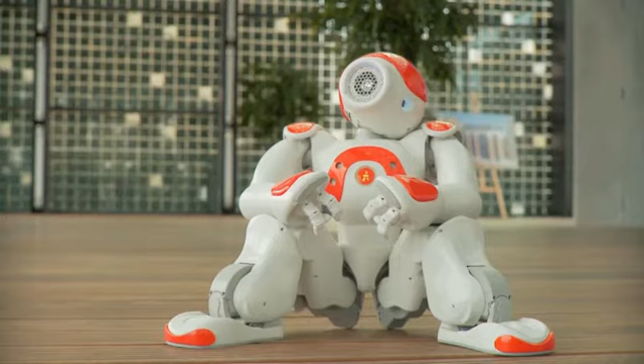I want to come with you.

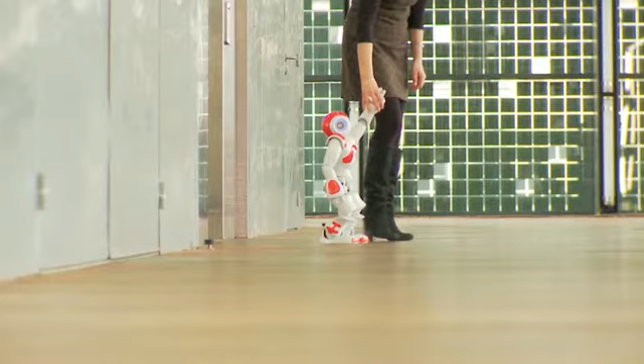Our goal with robots is to have robots helping people, and not only the geek. I want to have robots helping everyone. But in order to do that, we need to have the robot accepted by people.

I'm Bruno Maisonnier, head of Aldebaran Robotics, founder and CEO of the company. Give me something, please.

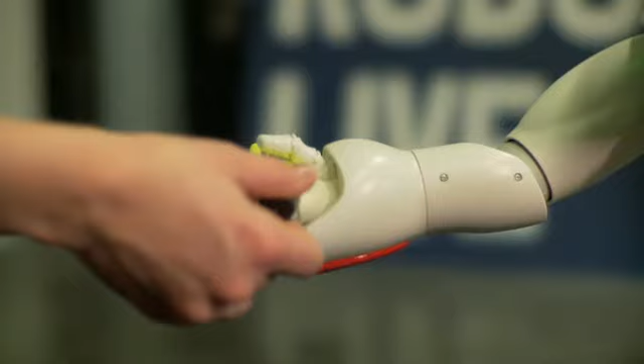We think that the robotic market is going to be huge in the future. And this comes from the simple fact that the world population is aging very fast. And we need robots to do whatever they need at home.

What do you want me to do? When people are depending on someone else and need to have someone else helping them, they are in a secondary position. But when they have a robot doing that, they are in the first position. They are leading.

Notre Dame University in the United States, they are really working with robots helping autistic kids. We discovered that robots are objects they can interact with, they are comfortable with interacting with robots, they like it.

The first impression that you get when you see the robots is the outside shapes. If the shape, if the form is too aggressive, you won't interact with that robot.

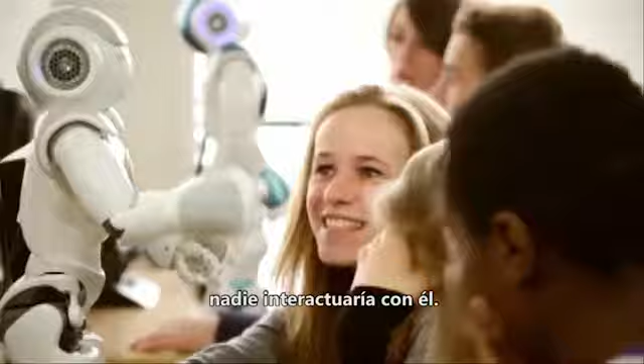There are many people ready to develop software, but we are just lacking robots. We are just missing robots. So that's why Aldebaran began with a platform for providing all those who want to explore this new world, who want to be part of this revolution, to be able to do it.

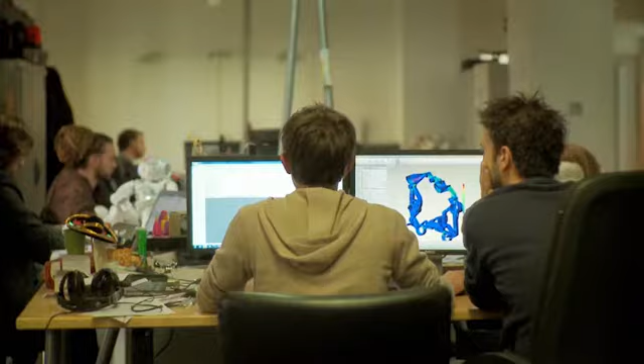I've been working for Aldebaran Robotics for 5 years as a mechanical engineer. I especially work on designing gears and integrating motors into the platforms we develop at Aldebaran.

Like Ludovic, I am also a mechanical engineer. I mainly work on the shells, but also on internal parts and the structure.

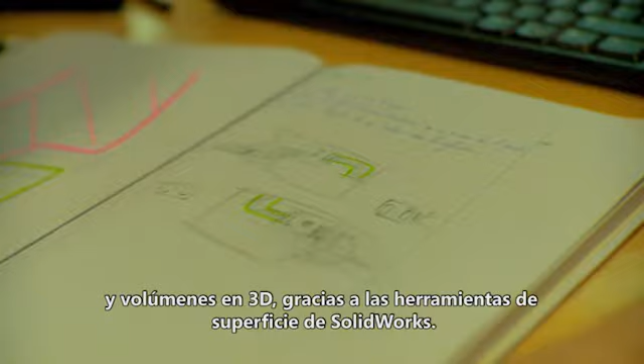For each project, the process is similar. We start with sketches, essentially 2D images, that we then translate into digital data and 3D volumes using SolidWorks surfacing tools.

This gives us the ability to rotate the pieces and robots in the space and to improve the design when it's not as pure as we want it to be.

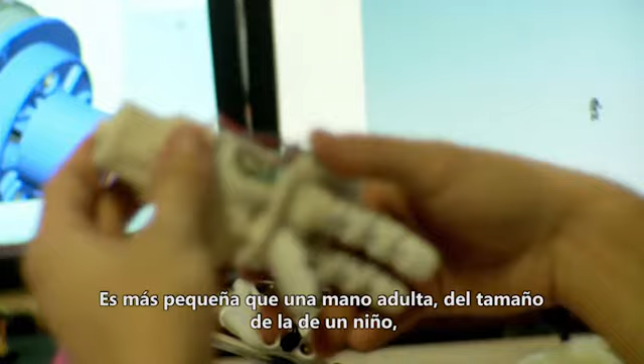So we start with the exterior design of the hand as we have here. It is smaller than an adult hand. It's the size of a small child's hand. And inside there are over 100 parts just for one hand.

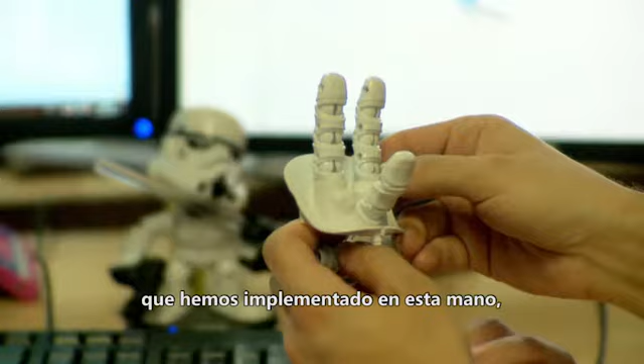In addition to all mechanical constraints, we have 2 degrees of freedom that we have implemented in this hand, and SolidWorks allows us to look at all the possibilities and optimize the mechanical design inside the hand.

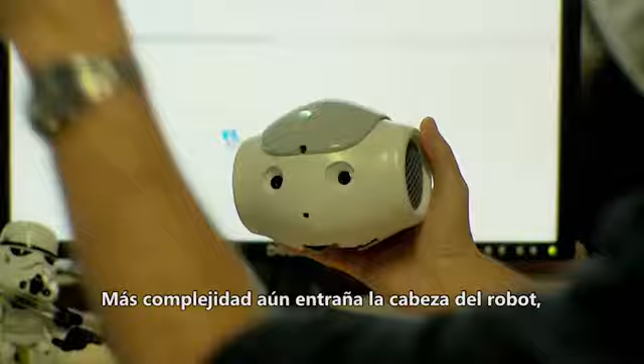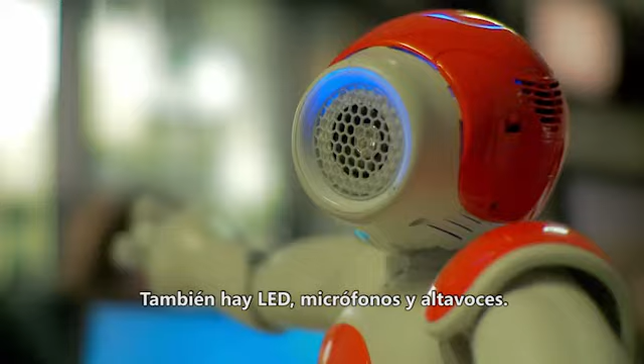Even more complex is the robot's head, which combines mechanical, electronic, and optical components, like cameras, for example. One might say that all of Nao's intelligence is gathered in its head. There are also LEDs, microphones, and speakers.

We use SolidWorks simulation, which allows us to generate digital models and know if the part will resist shocks or not, based on stresses we apply to it.

And once we have proceeded with validation in SolidWorks, we can move on to production.

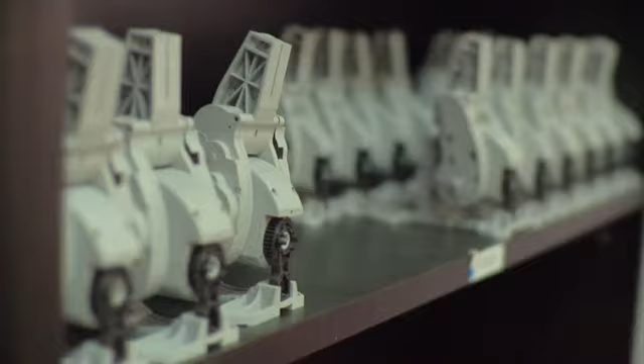We use SolidWorks in order to project the product into the future, and we can really optimize, really improve the parts before it exists, before it is manufactured.

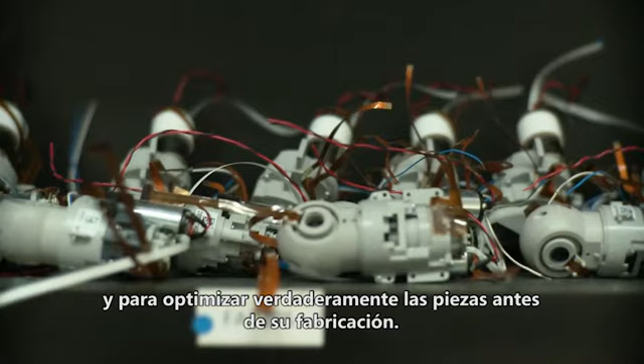You have to know that into that robot there are more than 1,200 plastic parts. On my team, there are 45 people working on the design, and I need to orchestrate the daily work and make sure that when we create new parts, the version is correct.

So for that we use EPDM, and it helps us to focus on innovation while EPDM is taking care of the structure of the project.

I hate the techno stress. I don't want to have devices that are asking me to invest intellectually to understand how they're working. So I don't want my robots to create techno stress to people.

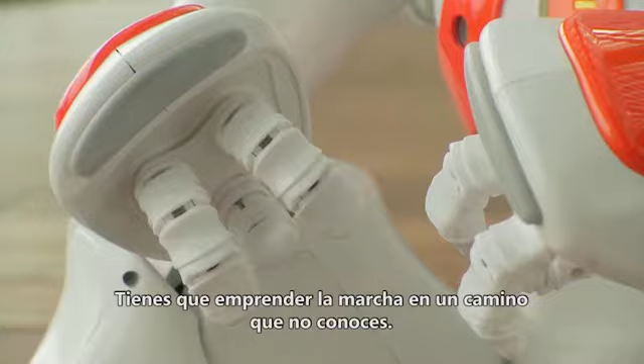When you want to change the world, to improve things, you have to go beyond what you are able to do. You have to decide to go for something you don't know how to do. It's a new territory to conquest.

Shall we try something new today?